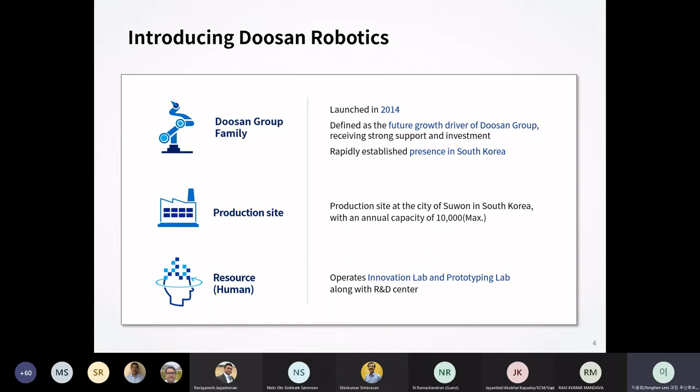More than half of our employees belong to R&D engineering, and we developed and improved the hardware and software of the robot with them. We have partners in more than 40 countries worldwide, including the India market, and continue to expand our overseas business partner network. Our warehouse is located in Netherlands and USA to support our partners.

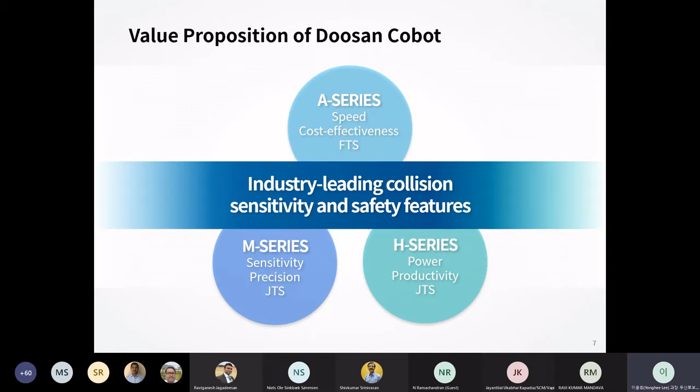From this page I will introduce the Doosan collaborative robot lineup and the features of each product. The Doosan collaborative robot consists of 3 series: M, H, and A, and the value proposition that each lineup aims for is mentioned on the screen. The A series aims for speed, efficiency, and the M and H series are for safety and precision with torque sensors.

From the left side, the M series, called the masterpiece model to us, has 6 torque sensors in each axis. With that, force and compliance control can be done, useful for more precise work. The H series has high strength and payload specification. Lastly, the A series aims to realize fast ROI with speed, efficiency, and cost effectiveness.

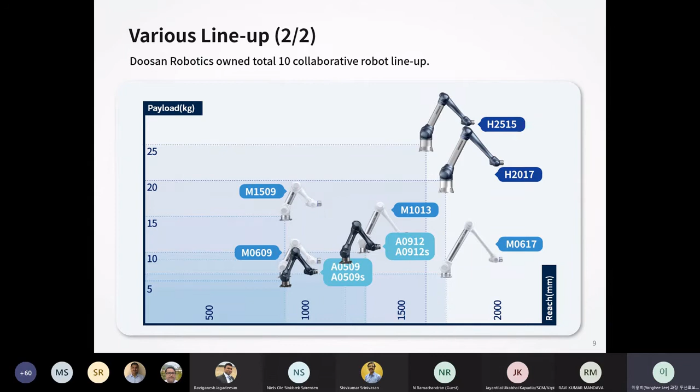The Doosan collaborative robot consists of 10 models, as you can see in the graph. We intend to satisfy customers' requests with the most various lineup among present cobot companies. I will introduce the characteristics of each series on the next page.

First, I will introduce the M series as a representative model. Above all, it is designed to focus on safety. Each axis has a torque sensor for precise working similar to a human being. According to international standard, the highest level of safety function has been certified. It also has an intuitive user interface and easy programming to help customers become familiar with the Doosan robot.

As I mentioned before, one characteristic of the M series is that the torque sensors allow you to perform precise work similar to a human being. Particularly, force control and compliance control among product scale are the biggest advantages of using torque sensors. Through this sensor, precise work such as polishing and gear assembling is available without any damage to the appearance of the product.

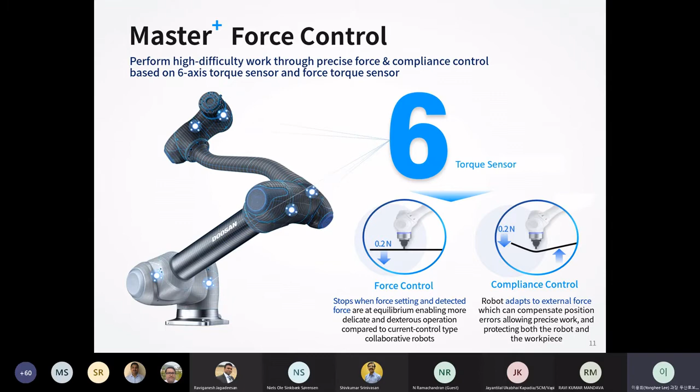Secondly, the H series. This model has the highest level of payload and safety among comparable specification robots. Considering payload and reach, it can compete with industrial robots.

The H series has 25 kg of payload and is widely used for heavy material handling and palletizing. Compared to other robots with similar specifications, the robot weight is not too heavy, so it is easy to install, reinstall, and integrate with a mobile robot such as AGV or AMR.

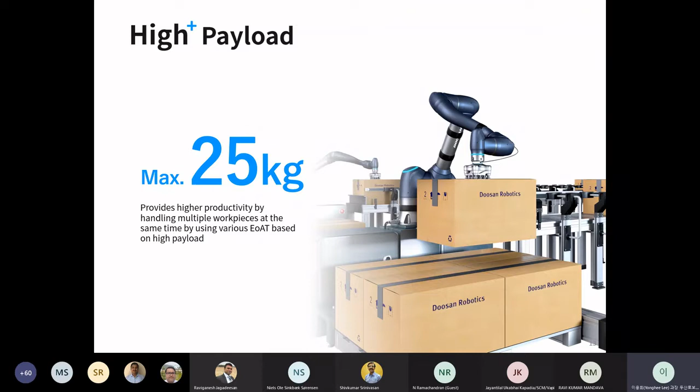The H series also has 6 torque sensors on each axis for safety and usability, same as the M series. You may think H series is like an expansion model of M series. The basic composition of the M and H series is a robot arm and teach pendant for programming, and a controller with main server roles such as power supply and communication.

Finally, A series. A series is designed with increased velocity and acceleration of each joint. It is suitable for applications which require fast cycle time.

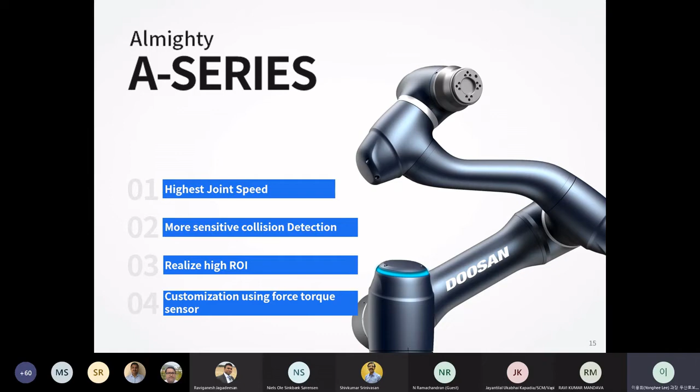Even though A series does not have a torque sensor, the collision detection level is sensitive enough compared to other comparative models. It is also certified at the same level as M and H series by functional safety, which I will explain later. Also, fast ROI can be realized with improved work efficiency and price competitiveness.

As I explained with the previous page, a force torque sensor can be selected and installed as an option to improve force control and compliance control on the 6th axis. When attaching a sensor, the letter S is added after the product name.

Basic composition of A series is robot arm, emergency stop button, and controller. Basic programming is possible with laptop or PC. Additionally, customers can purchase the teach pendant or smart pendant that can easily control the pre-programmed task as an option.

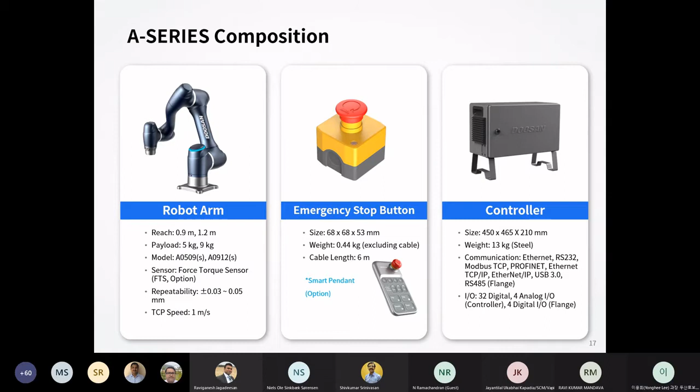By now, I explained the features and characteristics of each series. So what is the main reason for choosing Doosan Robot, and what is its advantage and competitiveness? With this page, I will summarize the advantages of Doosan Robot. Doosan Robot has 3 competitiveness: super safe, super easy, and super flexible. I will explain with the next page.

Firstly, Doosan Robot has obtained safety certifications according to international standards for 20 safety functions. The safety level is divided into 5 levels. Some safety functions are certified with the highest level, so we achieved performance level E and category 4 for our safety functions.

The next advantage is that it is easy. This is related to software developed by ourselves. For programming, a teach pendant like a tablet PC is used, with an iconized user interface so customers can make tasks easily compared to industrial robots. In addition, for direct teaching, which is a main function of collaborative robots, we have a button on the 6-axis, and direct teaching is possible immediately with this button.

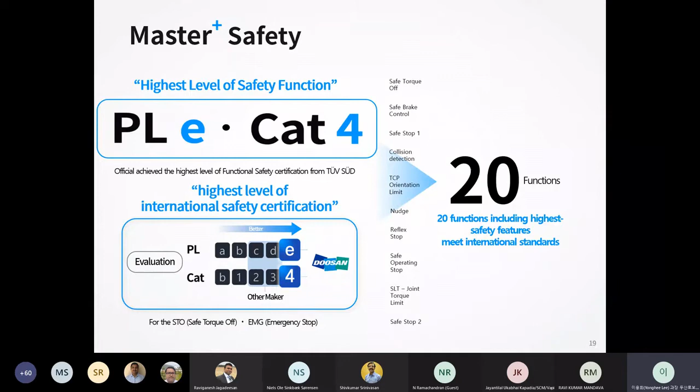Finally, I will introduce some video of practical applications of machine tending. Let's see the video. There are more videos, but please note these are Korean application cases. If you would like to see more examples, please refer to the Doosan Robotics official channel on YouTube.

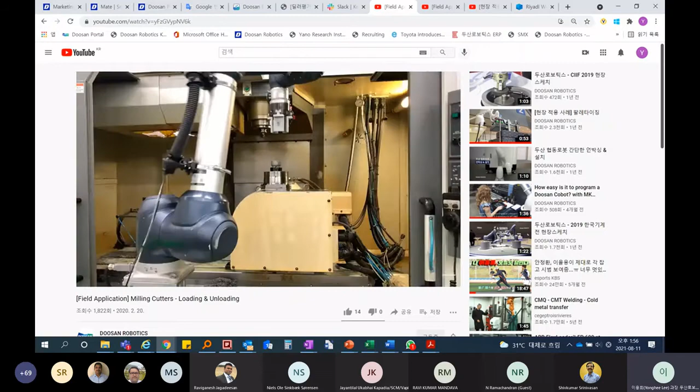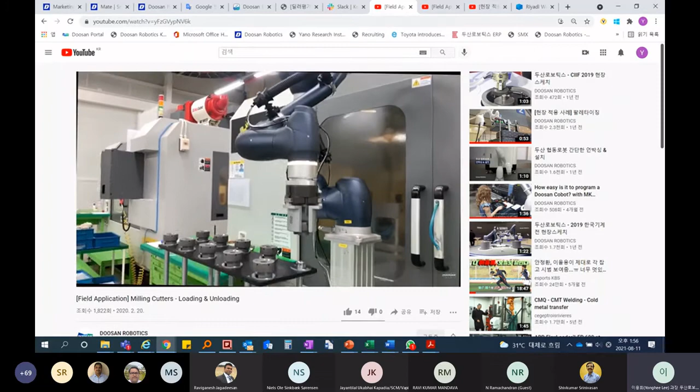The first video is the application between a milling machine and our Doosan robot. Instead of a human being, the robot works, inputting the raw material to this milling machine, and after finishing the manufacturing, takes it out of the machine. During the working by robot, the human worked on other tasks, so you can think of it as a collaboration.

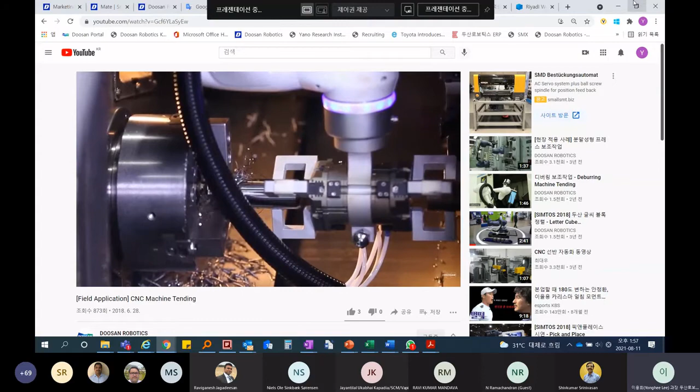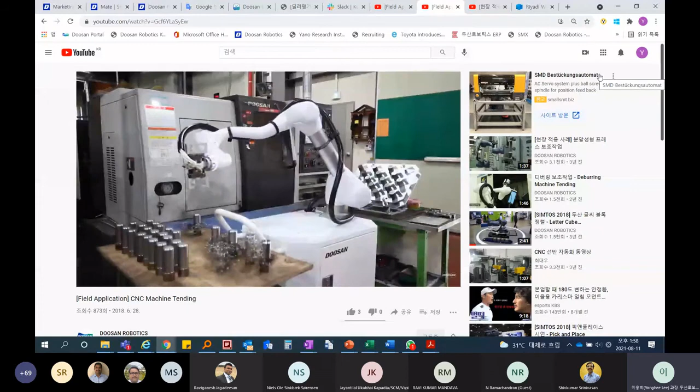The second case is a collaborative robot with a CNC machine, showing robot and human collaboration. You can think about the definition of collaborative robot and work here. When you see this screen, at that time people are working alongside the robot, so you can think of it as a collaboration. The Doosan collaborative robot works just beside a human being.

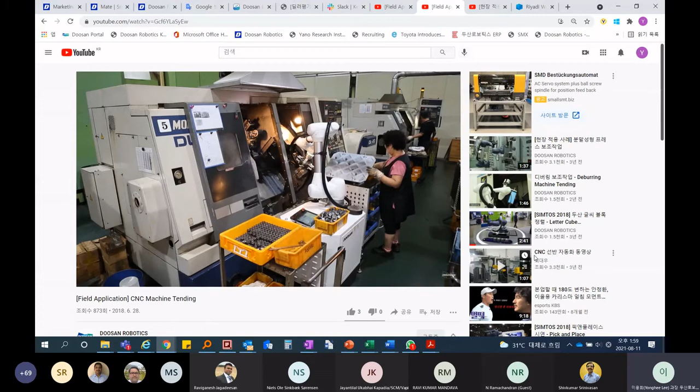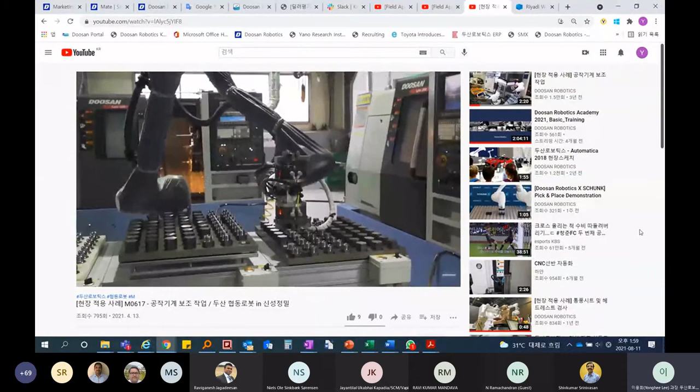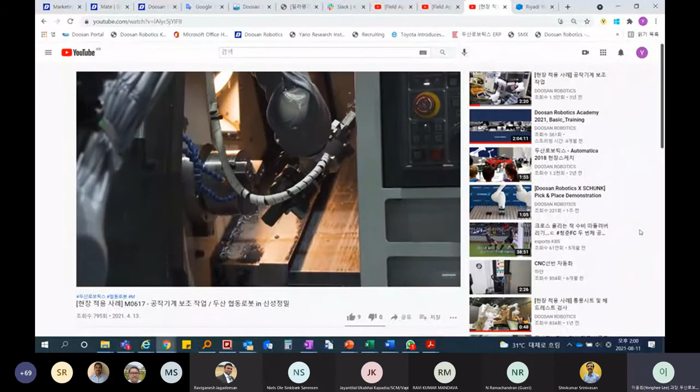The last case is efficient operation combining 3 CNC machines and 1 Doosan Robot. The layout was made considering efficiency, so the center placed the CNC machines with one of the Doosan robots with the longest reach, so it works continuously.

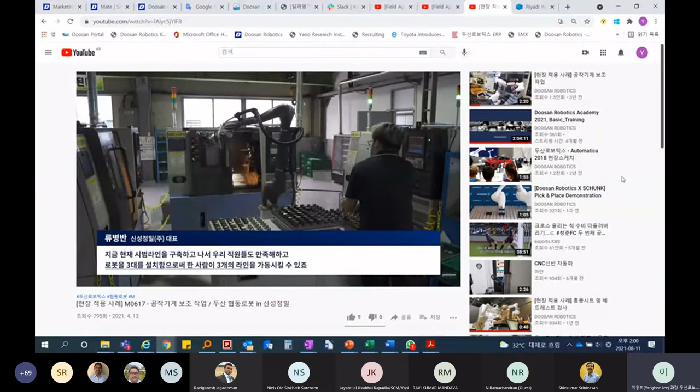This is an interview from the CEO of a Korean company, so I will pass this briefly. He said he is satisfied considering the ROI and work efficiency. Additionally, they have more plans for purchasing Doosan robots now.

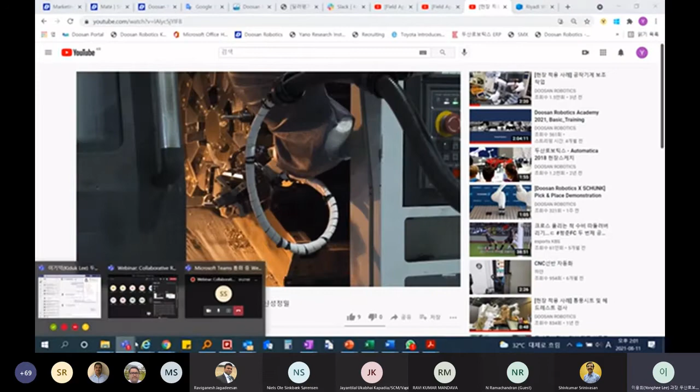By this, I'd like to finish my presentation. As mentioned at the beginning, I hope that you will understand the characteristics and advantages of Doosan Robot better than before. Thank you again for attending and paying attention to my presentation. Thank you.

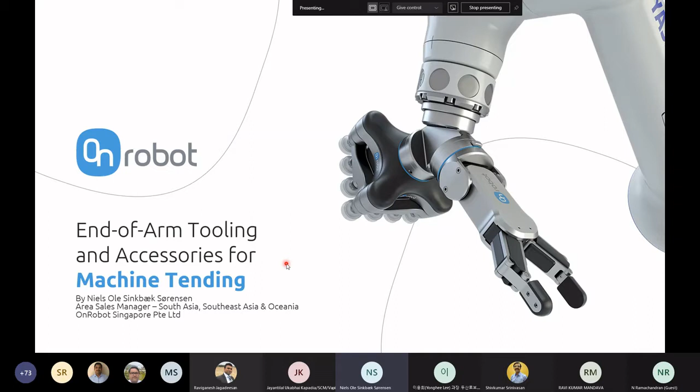So today I'm going to talk a little bit about who OnRobot is and what our vision is. Then I always tend to take a step back before going into the whole product part of it, so I'll talk very briefly about safety when it comes to collaborative applications, and then why machine tending, or rather collaborative machine tending, is growing very fast, and why it could be beneficial to you as a manufacturer. And then if I have time, I'll show a video or two with some success stories from machine tending we've been part of in the past.

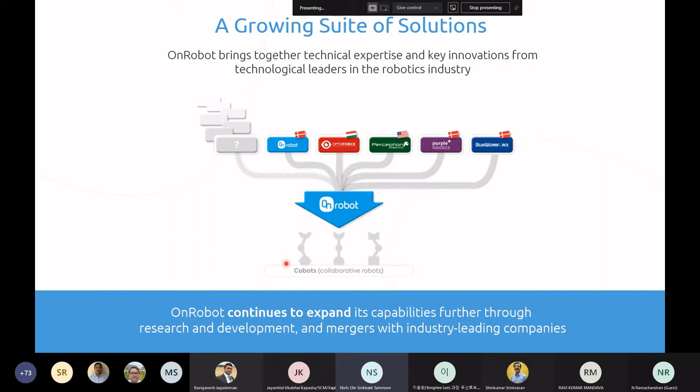So OnRobot, as I said, is basically a Danish company, but we have merged or bought over a number of companies over the past few years. So right now OnRobot is a mix of 5 different companies from Denmark, Hungary, and the US, merged into one big company. Our HQ is out of Odense in Denmark. We are around 185 employees globally now, with R&D centers and production in both Odense in Denmark and Budapest in Hungary. Personally, I'm sitting in our Singapore office, which is the APAC regional office, but we also have offices in China, Japan, and Korea as well.

So what's the vision? I was actually one of the very first employees in OnRobot. I was employee number 13. It's been close to 4 years now that I've been with the company.

When I joined OnRobot, basically all we had was one gripper, called the RG2 gripper. That's all we had, nothing else. Now the world of OnRobot looks very different. At that time, we were only able to integrate with one single robot brand, nothing else, and as I said, just one gripper.

That was it. Now what OnRobot offers is that we are able to integrate with every single robot brand in the market. We have a target of being able to offer tools for all applications in the market. We are not quite there yet, but we are growing very fast. We want to have all accessory types, which is needed if you're going to work in all application types. And finally, we want to be able to integrate in all industries, or rather all sectors.

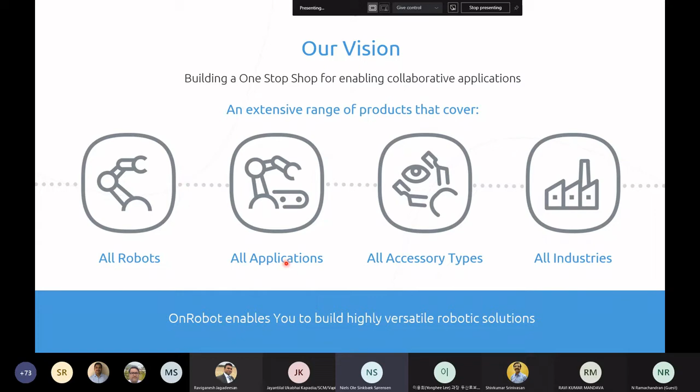Now, as I said in my introduction, I just want to take one step back and talk a little about safety. Generally speaking, and this has been a trend ever since cobots started, people tend to talk about a cobot like it's the savior of the world - as soon as you have a cobot, everything is safe, you don't need to worry about anything else, no fencing, nothing. That is not quite true. When you talk about a cobot setup or collaborative application, the whole system has to be safe, not just the cobot. And that, of course, includes the end effector as well.

So when you talk about collaborative application, there are certain standards or specifications you need to adhere to, and you need to check and understand how to do it. For cobot applications in particular, it's the ISO TS 15066:2016. So it's not a standard, it is a specification. Basically what it does is give you information on how to do a proper risk assessment, for instance what factors to look out for. As an example, when you talk about gripping, any gripper that closes with a force limit above 140 Newton is no longer considered collaborative, and you actually need to start fencing off your setup, even if you're using a cobot.

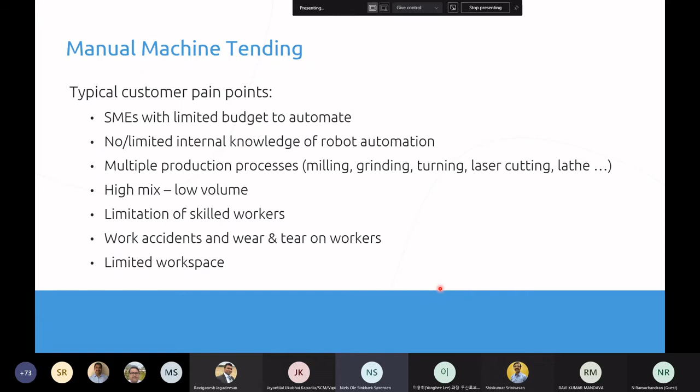So what are the benefits if you look at collaborative machine tending instead? As I said, you can basically automate one application at a time. You don't need to automate the full production at once, just one simple task at a time. So you don't need to worry about too huge an initial investment. You can start with one application, make your ROI, and then look at the next application.

As I already mentioned, cobots and collaborative end effectors are, for the most part, very easy to set up and program. We have production line workers who are now able to program collaborative applications without having an engineering background. That's another benefit: you don't necessarily need to worry about constantly having engineers or system integrators come in to do programming for you, spending a lot of time and money every time you need to change a process or product.

It also takes up very minimal workspace in the production. As I said earlier, taking up a lot of workspace in small manufacturing spaces was a key issue in the past. But cobots particularly take up very limited space, which is again a great thing.

Another thing is the flexibility I mentioned earlier. Cobots in general can be easily moved around between different production processes. So if you suddenly have a bottleneck in a certain application, you can easily move the cobot to that specific process. Maybe you need to do some reprogramming of the end effector, or even change the end effector, but the time is limited, and you can easily move it around without much headache. That's another huge benefit you get with collaborative cobots and collaborative end effectors in general.

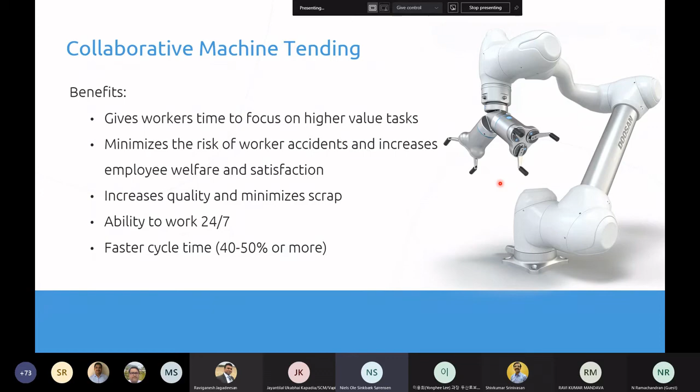Last but not least, one of the benefits of cobots is you can easily decrease your cycle time. Here you see a Doosan cobot with our 3-finger gripper, but it's a dual setup where you use 2 grippers on 1 robot. One gripper will insert the part that needs to be machine tended. Once done, the other gripper will pick up the finished part, turn around, put in another unfinished part, and once it's doing the CNC machine tending, it will drop off the finished part somewhere and pick up another unfinished part. By the time it's back up, it does the same again. You can actually save 40 to 50% cycle time. If you have a CNC machine costing $500,000-$600,000, saving that cycle time is a lot of money. So it's not only the cobot application you need to look at for ROI, it's also your machine tending machine.

So let's go into our products. OnRobot makes many different types of products. I mentioned the RG2 gripper, which was the only gripper we had when I joined, so you can see the growth we've had over the past just under 4 years. The majority of our products are still grippers - we have many different kinds. We have force/torque sensors, vision, and certain processing tools like screwdrivers and sanders. I'm not going to talk about that today since it's not really relevant to machine tending. And we have our quick changes as well.

Let me briefly explain how our system works. All our end effectors come with what we call a quick changer. In this case it's a manual quick changer. We have a quick changer robot side, which you screw onto the robot arm. Then any of these end effectors you can just click into the quick changer, and with the push of a button you can change between different kinds of end effectors in seconds, literally. So today you might want to use a 3-finger gripper, tomorrow a parallel gripper, the next day a soft gripper, etc. You can easily, without unscrewing anything or changing cables, change your end effectors for different applications in seconds.

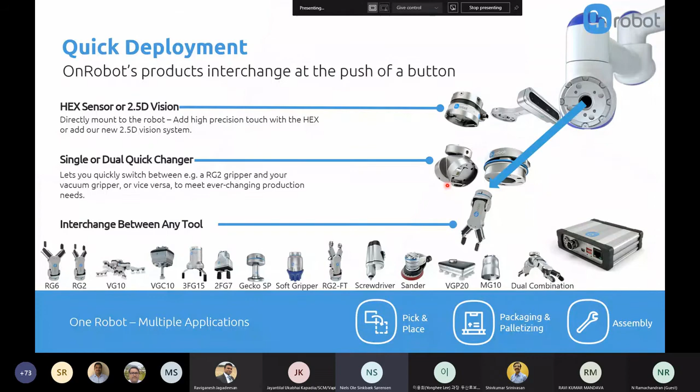What OnRobot is doing is basically selling you a system. One of our taglines is One System, Zero Complexity. You can use any of our end effectors on any robot brand, cobot or industrial robot, in the same way with the same software. So if you have multiple robots in your production hall - say a Yaskawa, a light industrial robot, and a Doosan cobot - you can actually use the same end effectors, mechanically and software-wise, across the different robots. That's a huge advantage.

It's taking a bit of time, so I'll go through this a little faster. Our first two-finger grippers are the RG2 and the RG6 - 2 stands for 2 kilo payload, 6 for 6 kilo payload. As I mentioned earlier, one of the key things with these grippers is that they're intelligent and electric, meaning they can give you feedback.

If you're looking at Industry 4.0, for instance, that's actually a requirement - being able to get feedback not only from the robot but also from the end effectors. Just using a basic pneumatic gripper won't give you access to that. So this is another benefit with these kinds of grippers.

Another thing is you can control your stroke, you can control the force, and you can change the fingertips here. You can just 3D print them and make your own fingertips. Here's an extension shown as an example.

What that gives you is easy access to use the same gripper for many different product types, sizes, shapes and weights, rather than having to buy and integrate a different gripper for every single new product. So for high mix, low volume production, this is where the benefit comes in.

And of course, there's a lot of safety features here. We have safety buttons, which are PLD Cat 3 safety. We have safety shields so you don't get your fingers stuck inside, and so on. You can see the round shape here, so basically you won't cut yourself if it hits a worker while operating.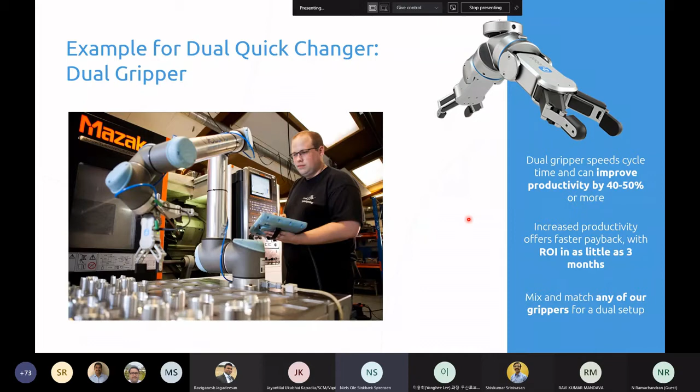This is our 3-finger gripper. This particular gripper is IP67 rated, so particularly good for dirty environments, which machine tending often is. It can take up to 15 kilos form fit, or otherwise 10 kilos payload - so quite a high payload as well.

As you can see from its shape, the way it closes is particularly good for round objects. So as an example, you might have different types of objects - some square, some round - and you can mix and match our grippers: a 2-finger for square, a 3-finger for round objects, on the same robot. And again, the software is very easy to install - you can do it in minutes rather than having to integrate.

For instance, if you use pneumatics, you have the air supply. It's a lot of maintenance. It takes time to set up. Sometimes the air supply is unreliable, and there might be safety issues with things being dropped and so on. All this you avoid with these kinds of products.

We have our 2FG7, which is a parallel gripper. It's also IP67 rated, and it's also clean room ISO class 5 certified, in case you put it in a clean room area, for instance a lab or similar. It can take up to 11 kilo maximum payload, and because it's IP67 rated, it's also very good for harsh environments. Similar to the others, you can fully control your stroke, change the fingertips, control the force and so on.

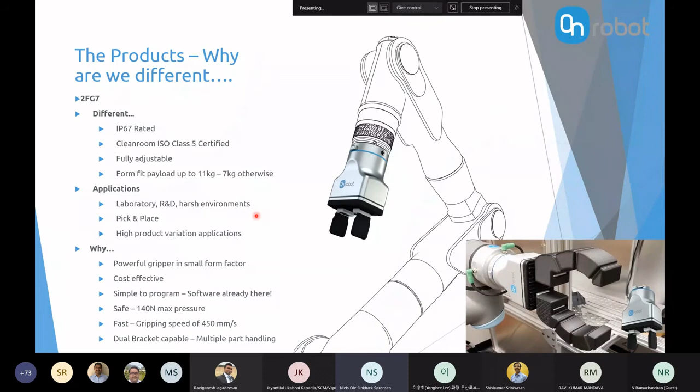So it's very, very flexible. This is our latest product. We launched this, I think, back in March, if I remember correctly. This is our MG10, which is basically our magnetic gripper with a 10 kilo payload, similar to the last two grippers. They are IP67 rated, so also great for things like material handling, but this could also be particularly great for picking up sheet metal, from machine bending and so on.

One of the key things with this particular gripper is that you can fully adjust the force. As an example, if you have a stack of say 100 sheets, with other pneumatic grippers it can be very hard to control the force, so you might end up picking up 2, 3 or 4 sheets in one go, whereas with our gripper you can easily pick up 1 sheet at a time.

We also have a proximity sensor. You might be able to see a small sensor here, so you can sense when there's a part that you need to pick up, and once it senses that, the suction or magnetic force will be turned on and it'll pick up. So again, it could be great for different kinds of machine tending applications.

Then we have different kinds of electric vacuum grippers. The first two is the VG10, which is the guy you're seeing here, and then we have the smaller unit, which is the VGC10. Both of them are quite versatile. As I said, they're both electric, so you don't need to worry about air hoses, pneumatics and all this kind of thing. It's basically out of the box, install them on the robot, and you're good to go.

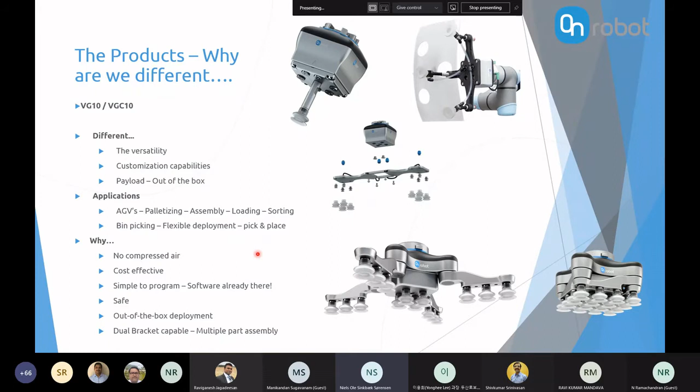This is also one of our newer products. We launched this at the beginning of this year, which is our VGP20 electric vacuum gripper, which has the highest payload in the industry of an electric gripper, up to 20 kilo. Again, it's super versatile. In this case, rather than 2, it has 4 different channels, A, B, C, D, which you can individually control. So you can pick up, for instance, 4 products in one go, but you can also remove all these and tailor-make your own adapters to fit bigger products or different shapes of products as well. Very high payload, no compressed air, very cost effective, and very easy to use.

Then we have force torque sensors. force torque sensors are sometimes used in machine tending as well. We have actually sold some in India for CNC machine tending. It's more where there's maybe a very tight fit to fit in the product, then force torque sensors in particular can be very useful. Ours are optical sensing, so we are the only manufacturer in the world using optical sensing. Basically, the black part you're seeing here is silicone.

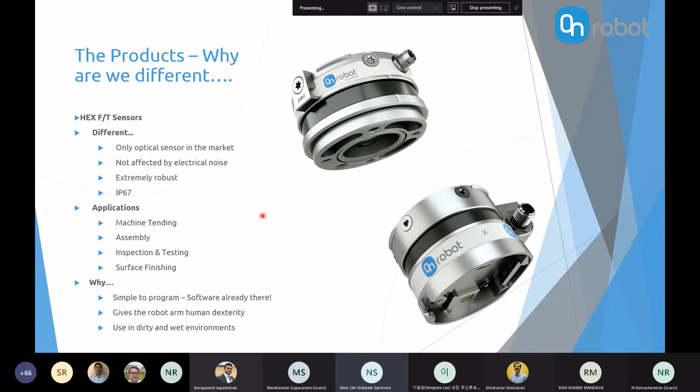So what does that mean? It means that we're using light emitters which are inside here, so it's not affected by electrical noise, which is an issue with normal force torque sensors. Again, IP67, so great for dirty environments.

The last product I want to talk about is what we call the EYES, our vision system. It's one of the very few 2.5D vision systems in the market. If you're not familiar with the difference between 2D, 2.5D, and 3D, most of you know a 2D camera. Basically, the half D means you get the Z coordinate, so you can measure the height of an object.

So if you have different items at different heights, with normal robotics you'd need to set waypoints, setting the height for the gripper to know where to pick it up. But with this camera, you don't need to do that. The camera will tell you the height of the product you're picking up and tell you exactly where the gripper should pick it up. That's a huge benefit.

It can be mounted on the robot arm, or it can also be mounted externally. That's another benefit. And of course, you can use it for inspection and so on. But for machine tending, it can also be very, very useful.

Shivkumar, where are we on time? We are about half an hour, I think. You've got under 5-6 minutes, so please go ahead. Okay, all right.

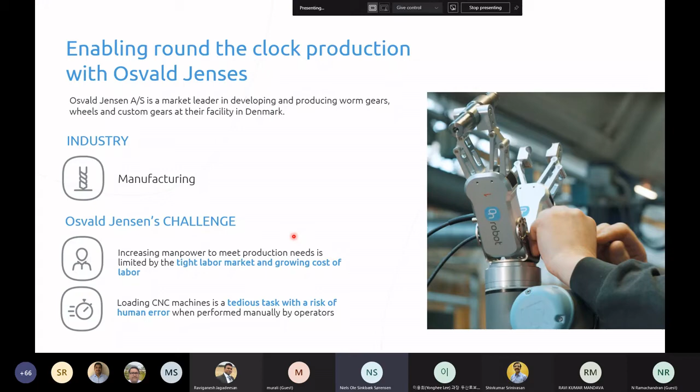So let me just show two quick success stories, both from machine tending. One is from Denmark and one is from Sweden. I think I'll just skip all this and go straight to the video.

I hope. Let me see. Nope. For some reason it's not working. Give me a second. There we go. We are not able to hear the audio. We can see the video though. I think when you share your screen, you will need to. Yeah, I forgot, okay let me just stop. Hang on a moment. Hang on. Can you see my screen again? Not yet, okay let me try again. Oh. Yes, I can see your screen now. Yeah, just hang on, it cut off. Now? Yes. Okay, let me try again.

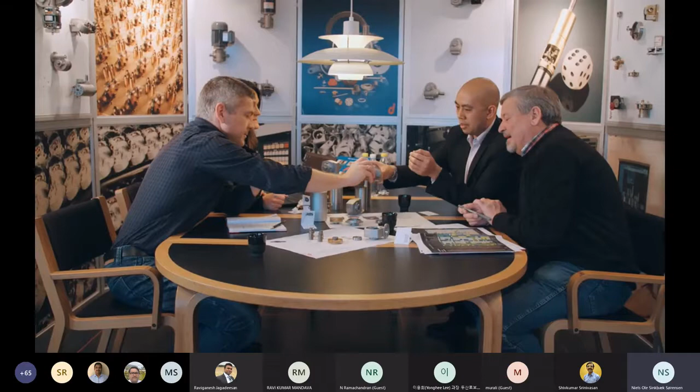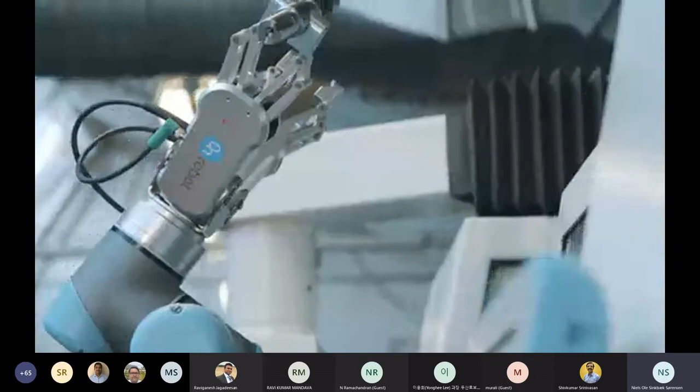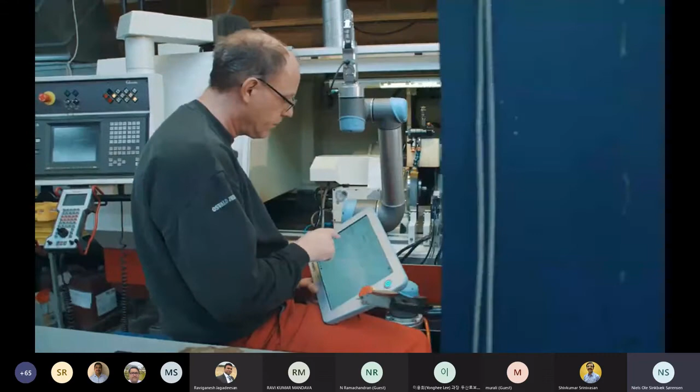Osvald Jensen is an over 100 year old company that has developed and produced transmission parts for a wide range of industries. We produce high quality worm gears, gear wheels, worms and gears here at our factory in Denmark. We maintain close dialogue with our customers through the design and development phase to ensure the right solution, quality and price. The collaboration between Osvald Jensen and OnRobot started when OnRobot, in the developing phase, needed consultancy, professional discussion, and adjustment of the gears in the gripper. OnRobot experienced problems and contacted Osvald Jensen, whose profile is to be a solution-oriented business partner regarding gears and gearboxes. We can advise in the developing phase, be a partner in prototyping, and be a manufacturer in series production. We solved the problem for OnRobot, and today we are using the gripper in our daily production. To stay competitive in a high-cost country like Denmark, and demonstrate we are a modern company, we decided to invest in technology that gives the best return. We have invested heavily in our CNC machines, and with collaborative robots, especially the OnRobot gripper, we can automate them cost-effectively. In 2015, we invested in our first OnRobot gripper, with a return on investment in less than 3 months. The machine operator has been relieved from tedious work, and the machine can continue working after the operator leaves the workshop. OnRobot has since developed a dual gripper solution, which compared to the single gripper increases CNC productivity by handling 2 objects at the same time. We realized that with another cost-effective investment, we could improve our productivity even further.

To sum it all up, we intend to invest further to ensure that we take full advantage of the collaborative robots.

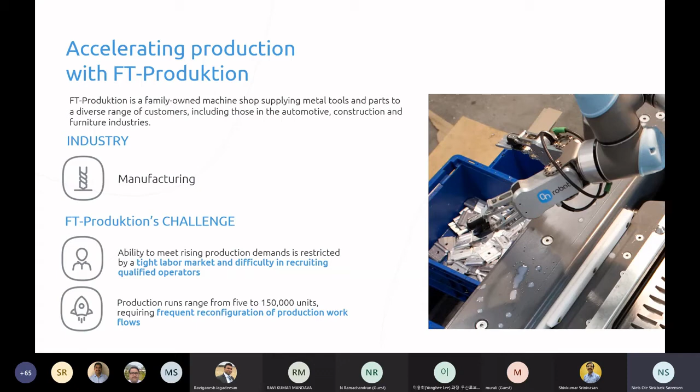The grippers you're seeing here is our version 1, where we didn't use the quick change, so it looks slightly different than the current versions. But I hope you noticed the difference between a single gripper and a dual gripper setup on one robot, and how you can really cut down the cycle time, which is what I talked about before.

So I'm just going to do one more video before I stop, which is from FT-Produktion, a Danish machine tending company.

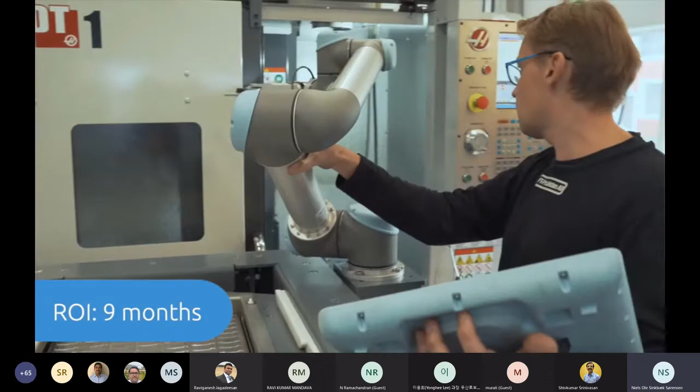All right, that's it for me.

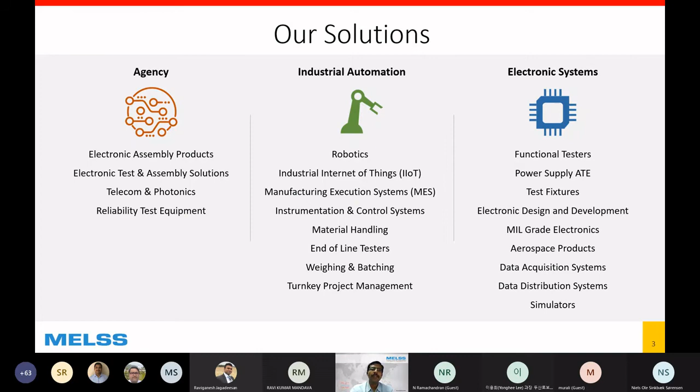Broadly, MELSS operates in 3 business verticals. The first handling electronic solutions, as well as products for reliability testing in the areas of telecom and photonics. The second business group is the industrial automation group, handling solutions for robotics, IIoT, MES, material handling solutions, and weighing batching solutions. The third business group is the electronic systems group, where we provide solutions for functional testing, ATEs, as well as a lot of projects for the defense and public sector units. Our head office is located in Perungudi, Chennai, and we are an ISO 9001 certified company as well as ISO 27001 certified for information security management.

Focusing more on industrial automation, MELSS presents itself as a turnkey solutions provider to all our customers. We are not a catalog product seller. We have a whole suite of solutions that we can offer and integrate — be it the mechanical area dealing with different types of robotics, unit and bulk handling conveyors, or anything with motion control, pneumatics or hydraulics, we take care of that. We offer complete control system solutions, it could be PLCs, IO links, sensors, and the required instrumentation to get your projects completed. And we've got a strong team handling industrial software for IT and OT integration — not just SCADA and HMI, but also complete tracking and traceability solutions along with barcode and RFID.

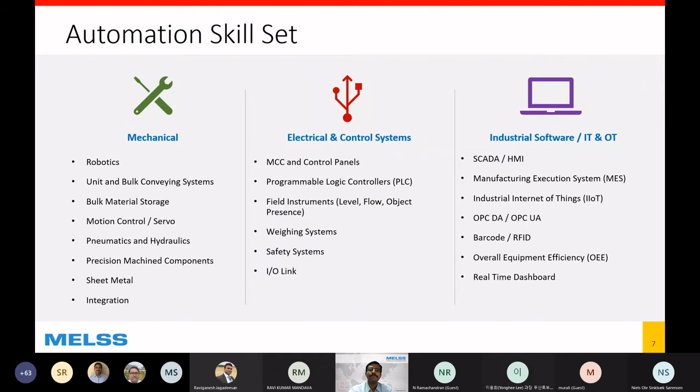Normally our projects start with what we call project conceptualization, where we come up with the entire project the customer requires on a 3D platform, including all the physical locations of where people are to be placed in the overall project setup, how you will have material movement, where the safety guards are required, including robotic cells and simulating them.

So the automation software team at MELSS has completed over 1,000 projects over the years, and we've got a team of close to about 40 people with different skill sets put together to provide such solutions to our customers.

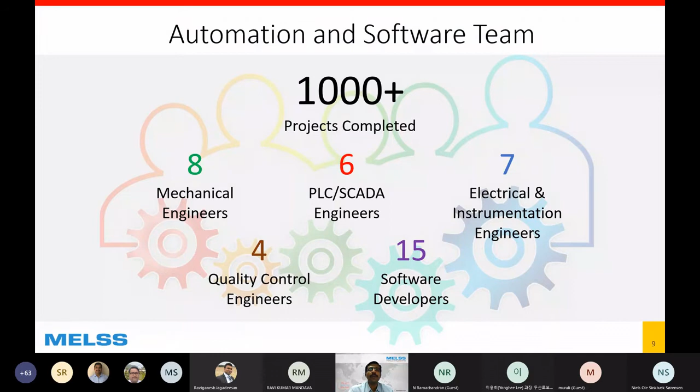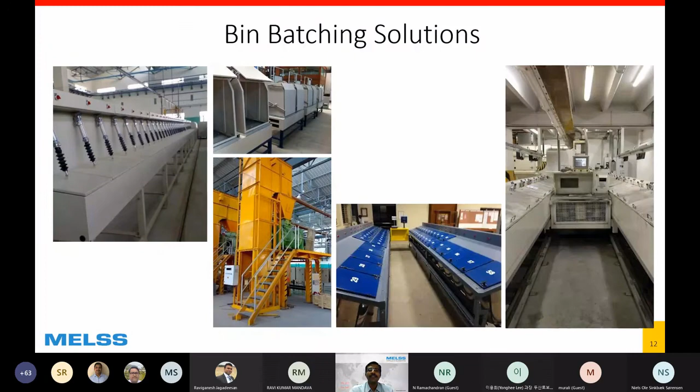We offer complete bulk material handling solutions. This is more in terms of powdered material and granular material that needs different type of material handling, weighing, batching, bagging, mixing, and so on, along with necessary dust collection equipment. A few photographs of the different type of projects that we have done in these areas, I'll skip them pretty fast because we focus on the robotic activities here.

We also offer unit handling solutions. These include different type of conveying solutions, it could be belt, rollers, different type of fixtures required to move your parts, along with turntables, direction changers, scissor lifts, any kind of equipment required to handle the material in terms of its movement. We also integrate with packing equipment, like stretch wrappers, shrink wrapping machines, or strapping machines, or carton erectors that may be required as part of your overall solution, along with online printing and labeling solutions.

We also specialize in providing end-of-line testing solutions, which are either functional or endurance test solutions, requiring high grade of accuracies, be it physical parameters, electrical parameters, or testing of signals and communication channels.

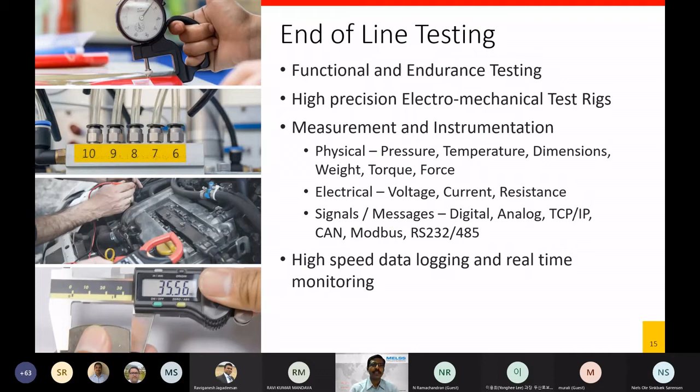MELSS also offers MES solutions for complete factory digitization, be it track and trace solutions, mistake proofing, Pokayoke, or providing OEE and dashboard type of solutions. We have integrated and deployed our digitization solutions in several factories in India and overseas for complete digitization and MES solutions.

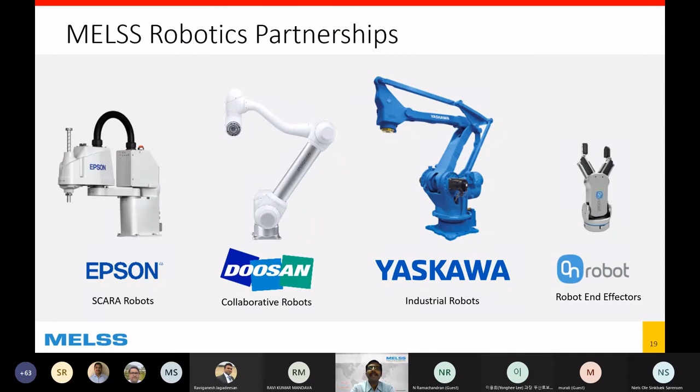So looking at the robotic solutions itself, which is the primary theme of today's meeting, MELSS works with a number of partners in this area. We work with Doosan for their collaborative robots and OnRobot for their end-of-arm tooling and end effectors. When it comes to industrial articulated robots, we work with Yaskawa Motoman, as well as Epson for the SCARA robots for high-speed pick and place applications or low payload applications.

So let me go into a generic slide on why industrial robots. Now, when you talk about industrial robots, there's a lot covered by both Mr. Lee and Mr. Niels on what robotics can do for you and how collaborative robots work. Now, I think the fundamental question of why industrial robots are required also needs to be answered.

We broadly classify the type of work that an industrial robot can be deployed in 4 areas. If your work is a dull job, repetitive, non-value added type of jobs, then we can deploy robotics there so that the manpower can be utilized in more intelligent activities.

It could be the dirty jobs. When I say dirty jobs, jobs that require high fatigue, there are payloads to be lifted, and these are dirty jobs which it's not good for an operator to handle.

The third would be the dangerous jobs. Let us say they are in toxic environments or environments which could have hazardous impact, including high payload applications, which could be dangerous for operators.

And the fourth are the delicate jobs, where you require very high precision. While human dexterity can never be achieved by robots as of today, I think the importance is that there are accuracies in terms of microns required in many applications, as well as when a human mind keeps doing the same high accuracy job over and over again, fatigue sets in, and machines don't have that fatigue. So that's the advantage of going for robotics.

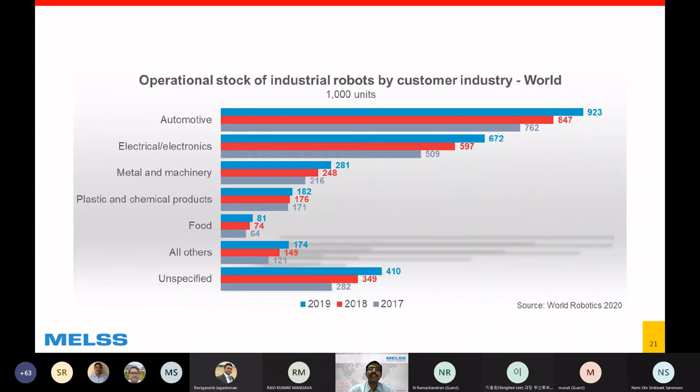You will all be familiar with a number of slides that you would have seen in the past in many webinars, which talk about the different statistics about robotics and robotic implementation across the world. I've specifically taken two slides which may be of interest. One is in terms of how robotics are being used in different industries. As you know, automotive is a leader in the use of robotics, followed by electrical, electronics, and then metal and machinery. So this is the global utilization of robotics for different type of industries.

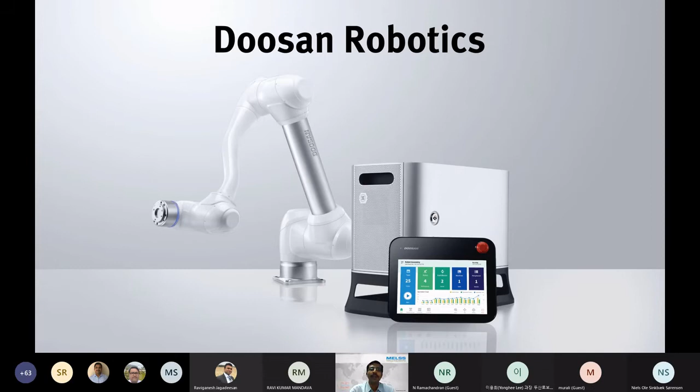So MELSS, as I said, we work with Doosan Robotics for their collaborative robots, and given that Mr. Lee has already given the wide range of products that they handle, I will skip. And we also work with OnRobot for the different type of end effectors, which was already presented. MELSS, we are an OnRobot certified partner, and we are able to supply and implement any of the end effectors that are being handled by OnRobot.

The different types of industrial robotic applications can broadly be classified under 8 different categories: material handling, assembly, material removal, quality, machine tending, material addition, welding, and others. Most industrial applications fall under one of these categories, whether it's transferring, palletizing, or different types of machine tending applications.

So what can MELSS offer? Now that you have collaborative robots and different types of standard end effectors, the time to market is very fast, meaning the time for implementation is quite fast. You don't have to do complex design. The RG2 gripper or 3FG15 gripper has a lot of built-in functions that you can configure using a web-based console, allowing many applications which in the past required a lot of detailed engineering. MELSS comes into the turnkey robotics implementation in these 5 areas.

While it is possible for many organizations with collaborative robots these days, a project is not as simple as getting a robot and putting it into place. Like any project implementation, we need to do a detailed study first, understand the project requirements, and do a clear design. When handling different types of products and parts, the design and engineering becomes critical to handle different part types, as well as looking at payload, reach, and so on.

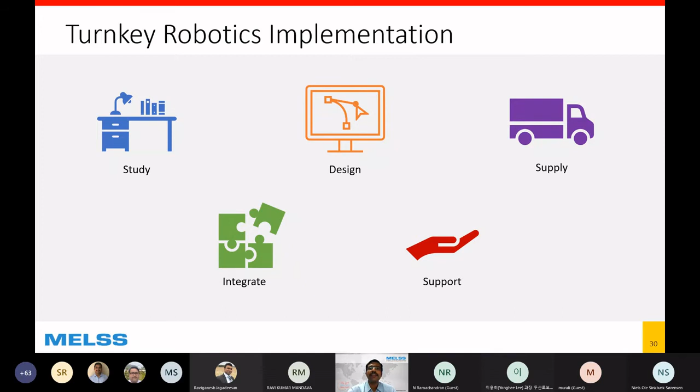MELSS supplies this equipment along with our partners, and we integrate any third-party equipment which can be bought off the shelf or needs to be designed and developed by ourselves. We then integrate - not just the different parts, but also integration to your control systems and IT. Apart from that, we also offer support. We have a nationwide presence and are able to attend to our customers across India.

When we look at a robotic project, there are multiple things we study in detail before addressing it. Firstly, we look at the different parts and variants. It might sound simple that there's a single part, but we need to go into the details of how many variants exist and what type of end of arm tooling is required - is it a hot surface, is it an abrasive surface?

Can it crush under pressure, would vacuum work for it, and if moved quickly, will it fall, will the gripper hold it in place - all this is very important. When looking at parts and variants, as mentioned earlier about high variant, low volume applications, if we have different variants, we need to identify and ensure the collaborative robot application works across all the different models and variants, or at least a good number of them representing high volume.

We also look at the payload. Collaborative robots come with different payloads, starting around 5 kg all the way up to 25 kg. It's important that the right payload is selected along with the reach. We'll go through a few examples to see how collaborative robots need to access different parts of machines and simultaneously do different jobs.

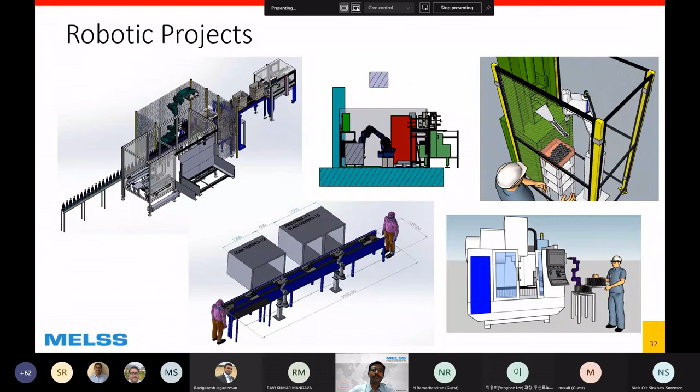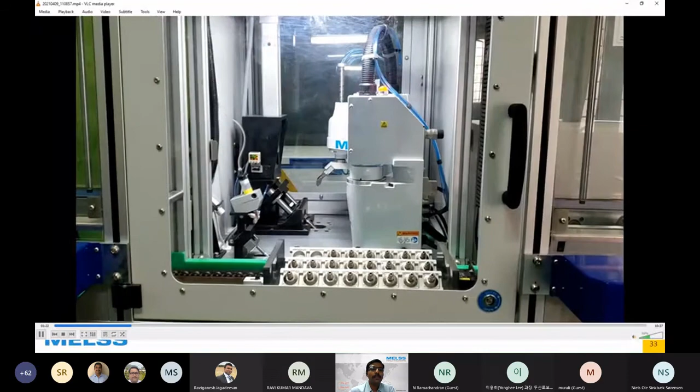Let's look at one application example here. This is a project we delivered for a customer some time ago, where we deployed a SCARA robot. It's not really a collaborative robot, but as you can see, the SCARA robot does a machine tending operation where otherwise an operator would have had to stand near this machine for many hours, picking and placing a part while the rest of the machine does different operations. This is a typical machine tending application, but in this case you also have to fence it to ensure operator safety, delivering a proper solution both in terms of cycle time and operator safety.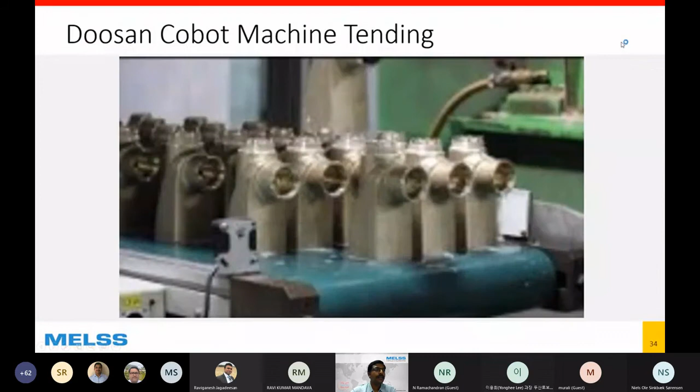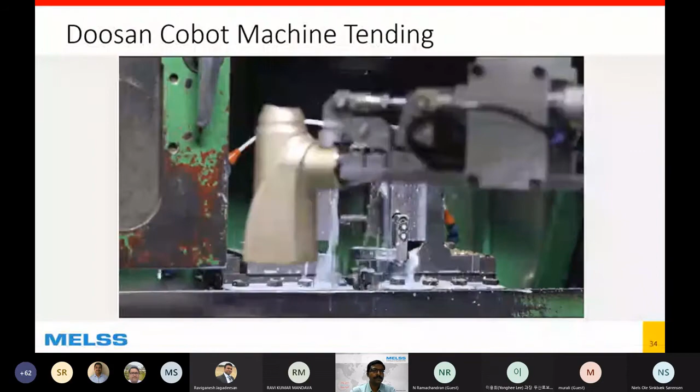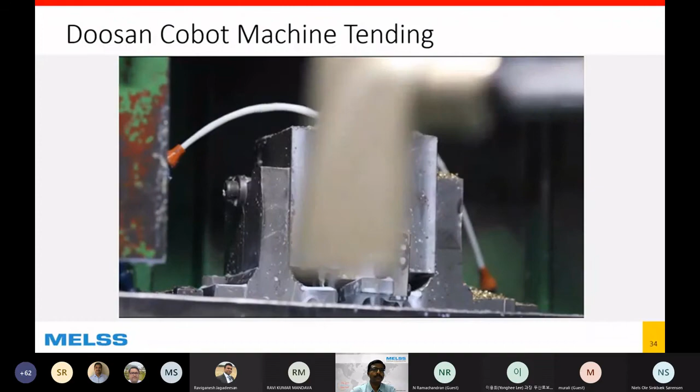Let me take up a few other videos as well. In this application, notice there is again no fencing required. It's a repetitive job done all day long, requiring some movement of the arm in different axes - you may not be able to do it purely parallel to the ground, but that's where the collaborative robot application comes in for machine tending.

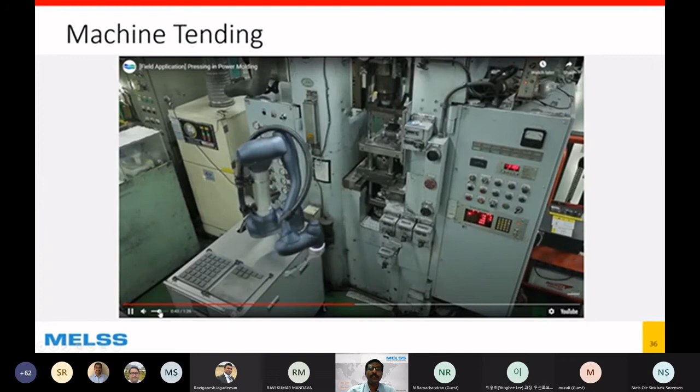Let's look at another application as well. As you can see, it's a kind of legacy machine being utilized, and here the robot itself is used to even press the push buttons on the machine so that operator intervention is removed. So even if there are no capabilities for us to fully integrate with that machine, such actions can still be done.

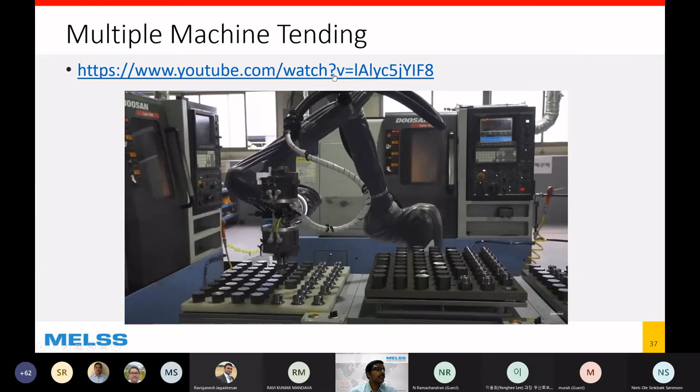This was a similar video - let's take a look at this video, which was already presented by Mr. Lee a short while ago. It's interesting to see in this application that one collaborative robot is being used for tending to multiple machines.

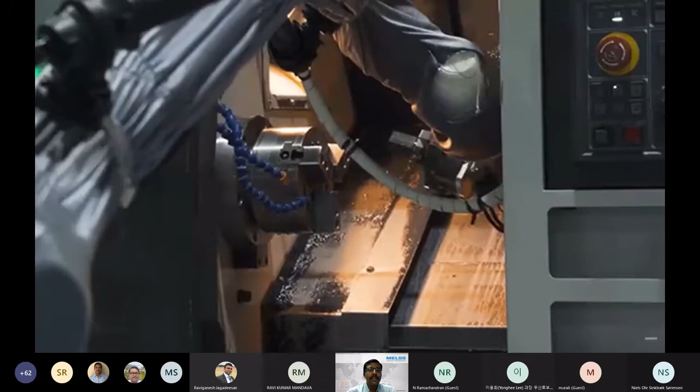Again, talking about ROI or payback, we could look at realigning your shop floor in terms of machine locations so that a single cobot may be able to tend to multiple machines. This gives a lot of advantages, especially when using grippers such as OnRobot's grippers for such applications. The parts handled on each machine could be different dimensions - one may require a 2-finger gripper, another a 3-finger gripper, or a vacuum gripper. We also have dual gripper mounting provisions available with OnRobot grippers, so that advantage can also be gained. Overall, it can be a highly optimized solution that's provided.

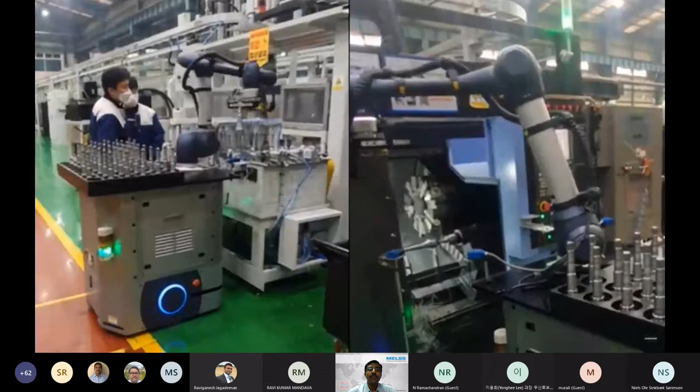Another application I would like to bring to your attention is the advantage that collaborative robots bring for machine tending. Unlike standard industrial robots, where you have long cycle times of machine operation, for example a 10-minute or 15-minute operation, we don't want the robot to be idle.

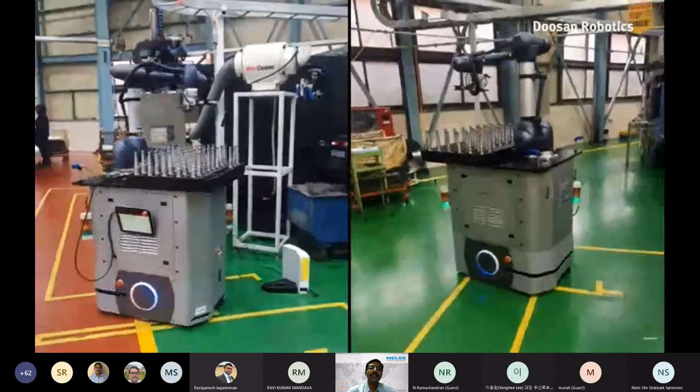The advantage that collaborative robots bring to the table is that these can be put on a moving platform. They don't require a three-phase electrical supply; they work on a single-phase supply. They can be driven off a battery, and they can be on a mobile platform and automatically move to different locations and tend to those specific machines. These are very good advantages that we can get out of collaborative robots.

Great. Thank you very much, and that was the end of my presentation. We can now take on any questions and answers that you have.